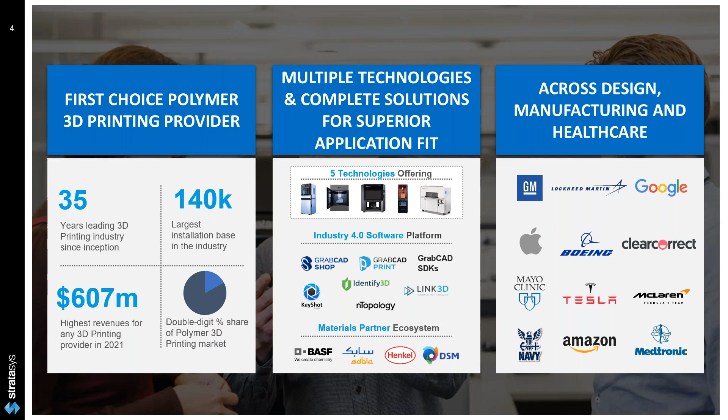Starting with the single FDM technology, today there are 5 solution offerings from Stratasys. We'll look into it more in depth when we cover each of the technologies. However, for a brief introduction across various design and manufacturing platforms, we also look forward to support the healthcare division or the medical vertical. That's where you get to see some interesting names like Medtronic, apart from the industrial majors such as Boeing in the aerospace division, so on and so forth.

So let's deep dive into understanding a little bit more on Stratasys 3D printing. What Stratasys believes and today offers solutions have begun with humble experience, understanding customers' needs, irrespective of any given vertical - whatever the need has been, in order to address the needs, Stratasys today offers 5 different solutions. In India, Stratasys has more than 22 plus years, and they're growing stronger with more than 850 plus customers and 1200 plus installations.

So there you go with education, automotive, healthcare, consumer products - a brief look at some of our customer names, apart from aerospace and defense. We are proud to showcase some of our valuable customers who are using the Stratasys product line. Here I take you with this automotive anthem from Stratasys, a video that takes us through how Stratasys 3D printing or additive manufacturing supports automotive as a given vertical.

Over the past quarter century, the automotive industry has seen remarkable advancements in manufacturing and technology. Helping shape that change has been Stratasys. Since our inception, we've been at the forefront of unleashing the imagination of designers and manufacturers, bringing their ideas to life with speed and efficiency.

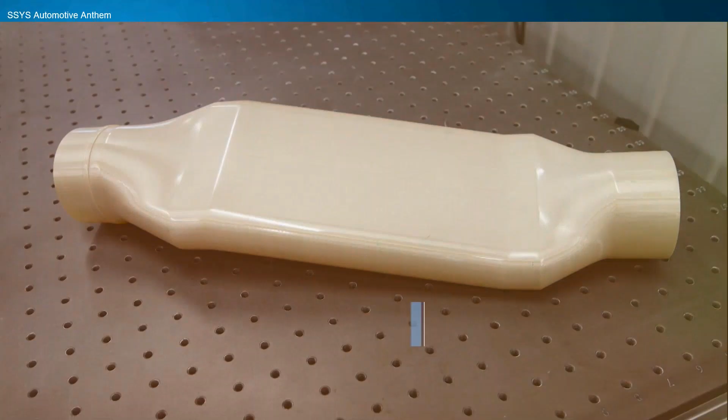Stratasys prototyping capabilities have shaved months and even years off the development process, reducing investment and hard costs dramatically. Automakers and suppliers of all types have realized the benefits of Stratasys 3D printing, and we've seen our technology go from the design studio to the factory floor with the adoption of custom 3D printed tools, jigs and fixtures, end-use parts, and low-volume injection molding.

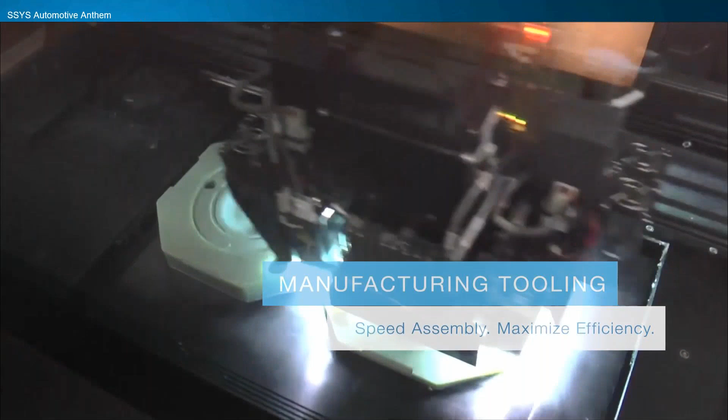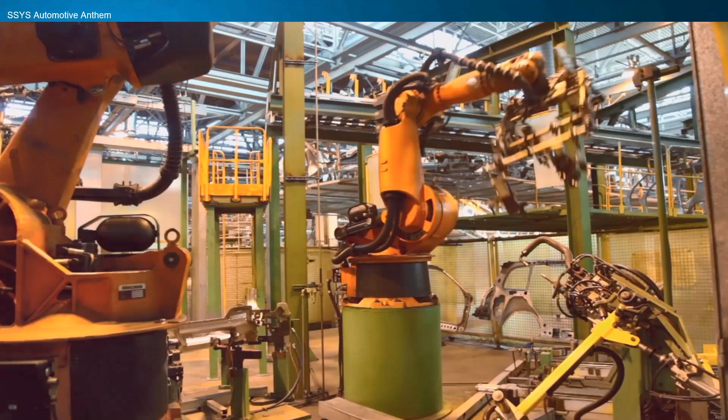We are reducing manufacturing costs and maximizing assembly line productivity. Stratasys can be found on the line of some of the world's premier automakers, helping them speed manufacturing time and reduce the weight of production tools. Stratasys is shaping the way cars are being imagined, designed, and developed.

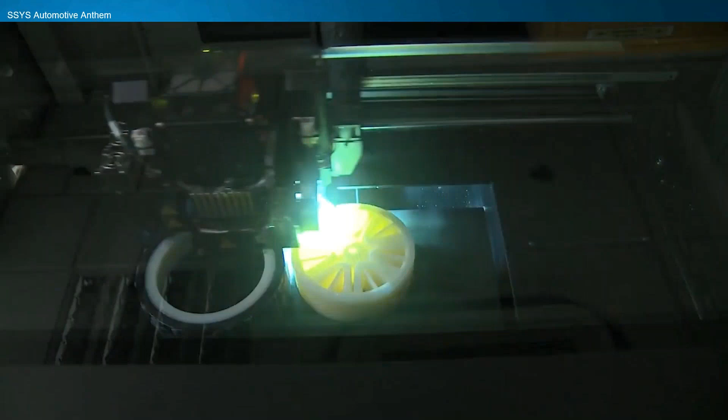Production parts can now be 3D printed in small volumes and even manufactured as part of the final vehicle. Lightweight end-use parts are reducing production costs and increasing fuel efficiency. And with next generation materials and technologies, Stratasys is positioned to help shape the industry for years to come.

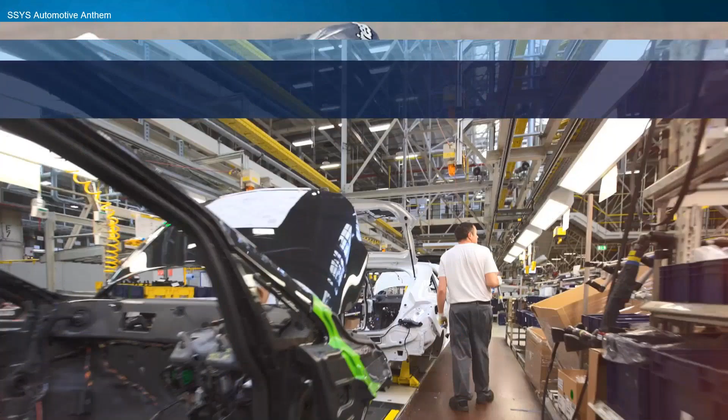Stratasys offers a wide range of 3D printing materials for demanding automotive requirements, from clear and rubber-like photopolymers for detailed scale models to tough, high-performance thermoplastics for extreme real-world environments. We empower automotive manufacturers to stay one step ahead of industry challenges with cutting-edge engineering solutions and a range of additive manufacturing technologies for custom applications.

Stratasys is shaping more than tomorrow's automobiles. We are helping shape the innovation, creativity, and manufacturing capabilities of those who drive the industry forward.

So, it's been an interesting introduction for automotive customizations from prototyping to manufacturing solutions with Stratasys. Now, in comparison to traditional or subtractive manufacturing, there are quite a lot of advantages with subtractive, but let us also look into some of the disadvantages when you're going to realize a physical part from a digital data.

It's a longer setup time. You need specific tools for every given operation that you need to carry out and multiple settings. It's not a single step process. And more importantly, designs are limited and locked to only manufacturing designs that can be taken up in the subtractive world. You would not be able to achieve lightweighting of parts. And more importantly, while we talk about lattice structures to optimize the weight without compromising on the component's performance, these are areas where there are a lot of disadvantages that we look at.

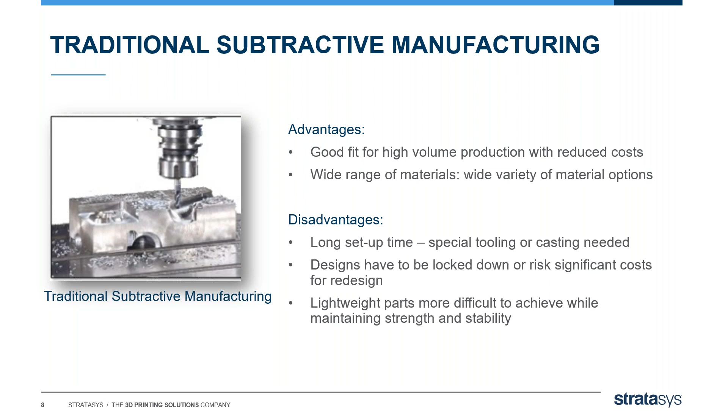However, when it comes to the best fit for productivity, it's subtractive. Let's look at 3D printing as a complementing technology that can work along with subtractive manufacturing. That's the message that I want to give.

So additive advantages - we are looking at unlimited advantages, because there is no limiting factor when it comes to designs. The freedom of designing, freedom of designers to bring out their best ideas that could take shape. Irrespective of any given complexities, 3D printing as a layer by layer additive process gives enablement to achieve any given complex design in real time.

And this could also enable supply chain issues that could get sorted out with flexible supply chain, and more importantly, without tooling, you get the most complex parts in quick turnaround time. Whether it's casting, using a polymer part, you also get sheet metal parts today with the manufacturing process. So there's a whole lot to talk about, but let us look at some of the brief disadvantages. There's a limited availability of materials.

Traditional manufacturing becomes more mature, but whereas when it comes to realizing the first prototype or lightweighting your manufacturing tooling, other than 3D printing today, we cannot expect any other solution to support.

So based on all the customer's needs and understanding what the customer requirements given from various vertical statuses, today I have 5 technologies and they are best in class that we are going to look at. The polyjet on the far left, let's begin with, we have stereolithography, and in the middle we have origin P3. Well, here is a 3D printer for manufacturing, production parts, end use parts, very interesting.

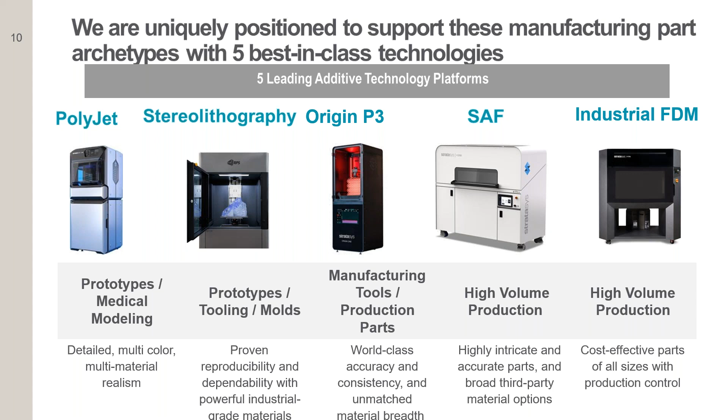SAF is a powder bed fusion technology, selective absorption fusion, and there goes the workhorse, the industrial FDM, introduced by Stratasys, the patented technology that we talk about. So it's beyond prototyping today, even for high volume production. So each of the technologies are very unique. Let me take you through very briefly with how the industry is adapting additive manufacturing solutions of Stratasys.

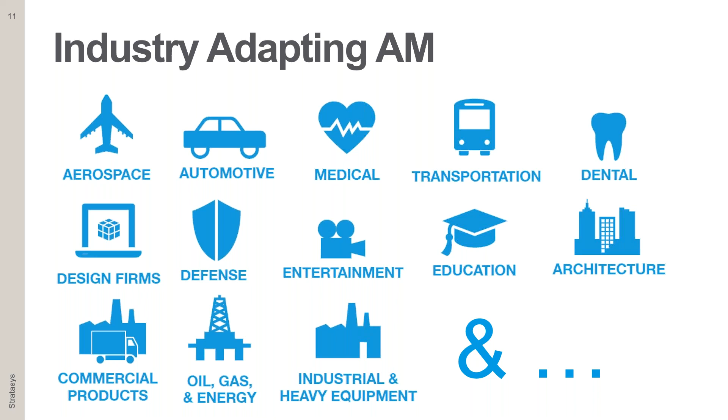Let's begin with aerospace, then we move on. We're looking at automotive and various other verticals that are benefiting from Stratasys additive manufacturing solutions, and it keeps growing.

Design, engineering, manufacturing aids and production - where do these solutions stand? We look at the jetting process, or the material digital light processing as a P3 technology - programmable photopolymerization is what P3 is all about. For volume production, the technologies are powder bed fusion and DLP. But when it comes to FDM for manufacturing aids, jigs and fixtures, and large parts, it's the best in class for industrial outputs. And for engineering your designs for visual prototyping, there is SLA as well as polyjet.

So what's polyjet all about? Here we are looking at multi-material realisms - you're able to achieve high fidelity end product models with polyjet, on a single tray, whether you wish a single material output or a multi-material combined end product. By end product realisms, I mean products that finally get labels, text, colors, and every given detail, ideally printed out. That's exactly where these are called high fidelity models. And more importantly, beyond the engineering realm, we look at medical anatomies today with polyjet technology.

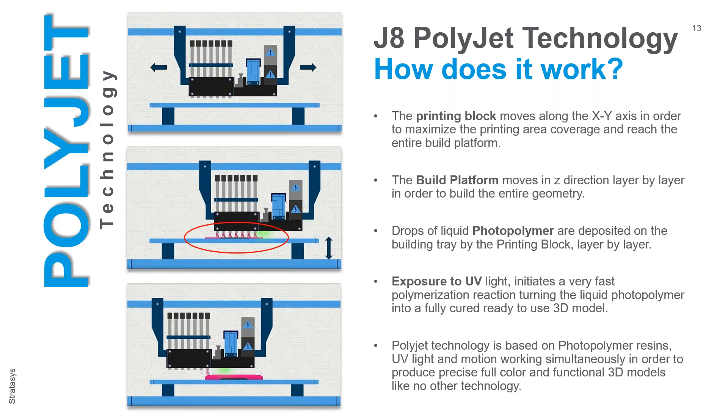It's no match to what the capabilities of polyjet technologies are. The polyjet systems and solutions from Stratasys work on photopolymers. When exposed to UV light, they solidify from a liquid to a solid state. The process begins layer upon layer, and you have finest layers of 14 microns - that's how unique this technology is.

So here you see that you could turn your design inspirations into reality - a fabric model printed with all the details of a smart speaker in a single shot. So whether we look at concept shapes, detailed designs, or the final design, by combining multiple materials you have the best in class. Irrespective of any demanding design needs, here is a solution to enable realization of your high fidelity models. You see transparent, opaque tests, and a PCB in different colors - and the only technology today that could support nearly 2,000 different Pantone shades, Pantone validated 3D printing solutions from Stratasys. These are compact systems that could meet your design realisms.

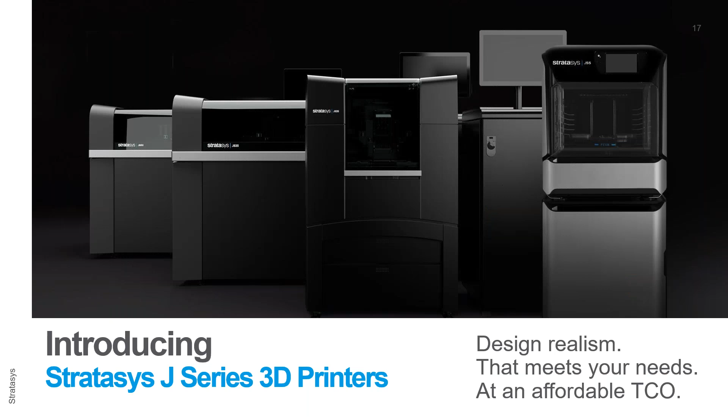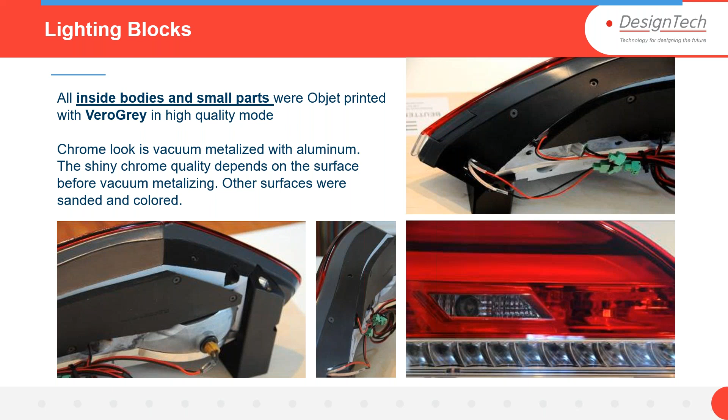Now some of the lighting blocks in automotive are crucial and critical areas of work in the development process. Any given R&D team from the automotive sector has to step into having complex designs realized, and that could only happen with tooling, which consumes a lot of time in the manufacturing process. Here we have a 3D printer that could give you an output with very minimal post-processing comparable to injection molded clear parts in different colors and shades.

Here's a video from Audi which has English subtitles.

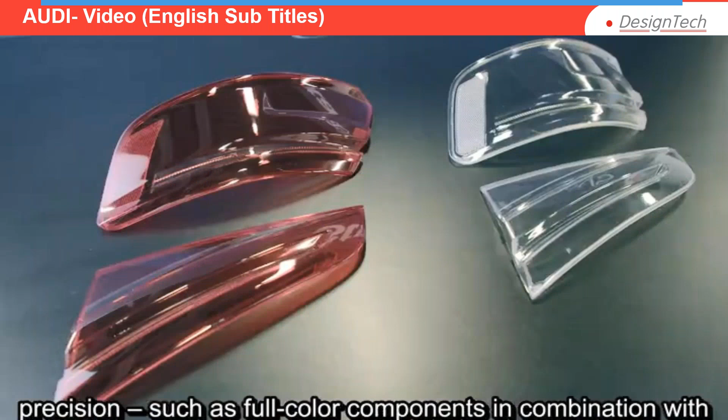Die J750 ist überall dort besonders geeignet, wo es um höchste Präzision geht. Vollfarbige Bauteile in Kombination mit Transparenzbereichen oder sogar flexible Oberflächen sind möglich.

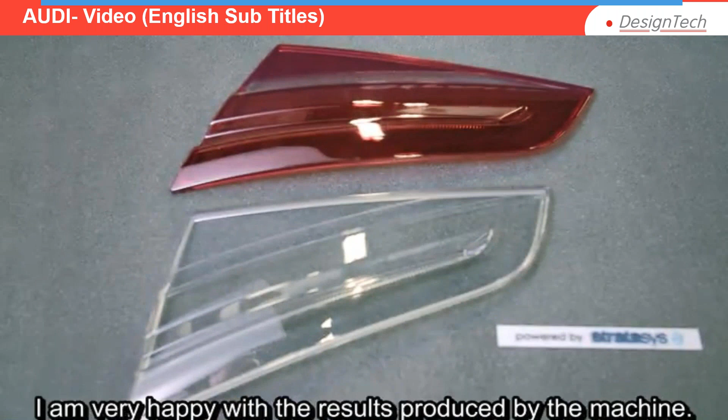Wir erwarten wirklich einen Geschwindigkeitsvorteil durch den Einsatz der J750 von 50%. Stratasys kommt mit neuen Ideen, mit neuen Ansätzen auf uns zu, nimmt unsere Anforderungen auf, sodass wir tatsächlich neue Anwendungsgebiete für den 3D-Druck erschließen können. Ich bin sehr zufrieden mit den Ergebnissen, die die Maschine liefert. Wir werden schneller und wir werden günstiger.

So well, today the PolyJet technology from Stratasys offers beyond what J750 is all about. We have the J850 combining 7 materials with advanced materials, vivid colors. We use the term ultra clear materials for higher levels of clarity in comparison to the injection molded parts, whether it is polymethylmethacrylate or polycarbonate clear parts.

So this is one area where we are focused to showcase some of the clear part challenges that auto industries come across. And we have the solution to print and develop your parts so that you will be able to do your functional testing and evaluations. Now it's time to move on to SAF.

What does SAF mean? Selective Absorption Fusion, right? Well, Stratasys H350 is a 3D printer with powder bed fusion technology. So let me introduce SAF to you all by playing this video.

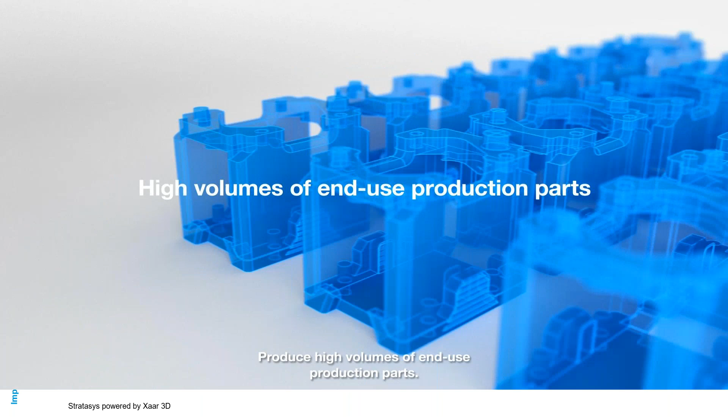Introducing Selective Absorption Fusion, or SAF, the latest 3D printing technology from Stratasys and the core of our H-Series production platform. Produce high volumes of end-use production parts, print after print. This is powder bed fusion reimagined. SAF's carriage architecture offers a unidirectional one-pass print fuse process, helping accelerate your production.

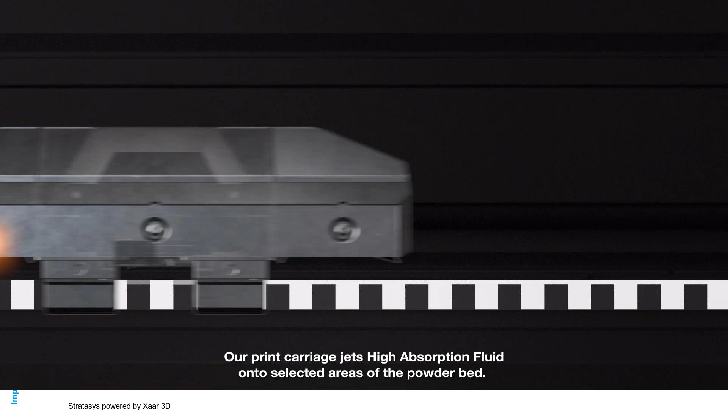Dual carriages operate inline sequentially across the print bed. Our print carriage jets high absorption fluid onto selected areas of the powder bed. In the same pass, an infrared lamp heats the particles in these areas, causing them to fuse together and form a layer of the part.

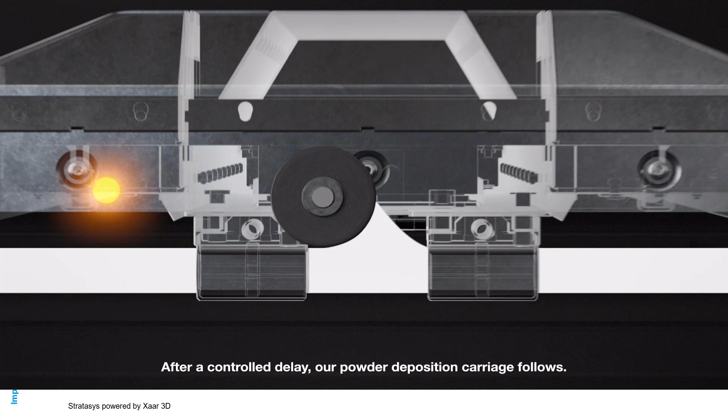After a controlled delay, our powder deposition carriage follows. Deposited powder is immediately heated, which benefits process reliability and part quality. All particles experience consistent exposure to temperature and time, wherever they are on the bed surface, ensuring stable part properties.

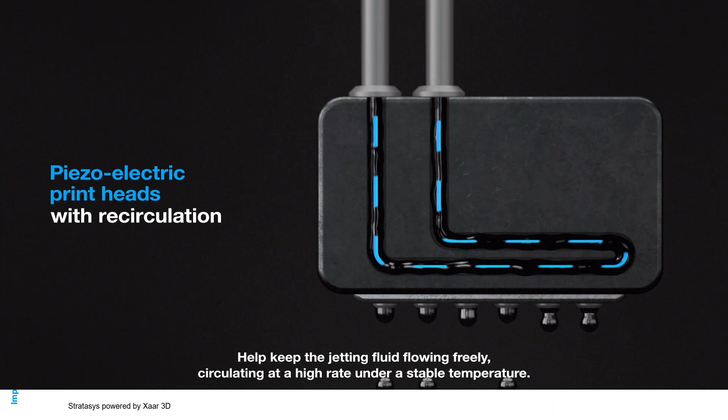Proven industrial-grade piezoelectric print heads help keep the jetting fluid flowing freely, circulating at a high rate under a stable temperature for long-lasting, reliable performance. Our big wave powder management helps maintain temperature control, reducing powder aging by immediately recirculating overflow powder.

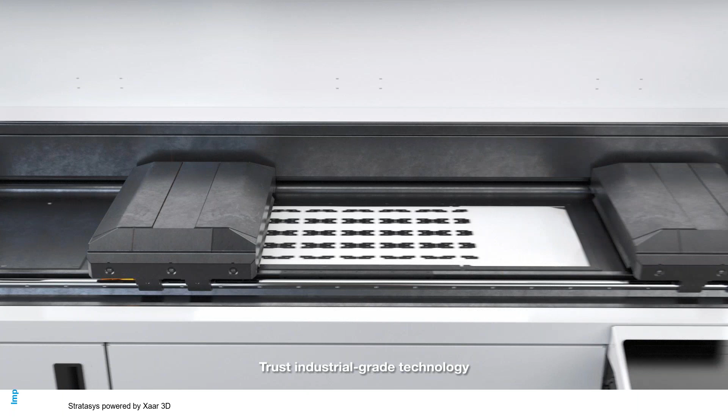SAF technology reimagines what's possible with powder bed fusion. Maximize production throughput with our one-pass print fuse process. Trust industrial-grade technology to print reliably and consistently. Print cost-effective end-use production parts in high volumes. Take your production to a new level with SAF additive manufacturing technology.

So with SAF here, we are looking at having volume production. While we talk about volume production, what are the materials that go along with? Today we have polyamide 11 and PA12. PA11 is a 100% bio-based material, which has been developed using sustainable castor oil, which has high ductility as well as that can take high impact loads.

Well, the SAF H350 that we talk about, the selective absorption fusion technology from Stratasys, today plays a major role for automotive OEMs to print interior parts.

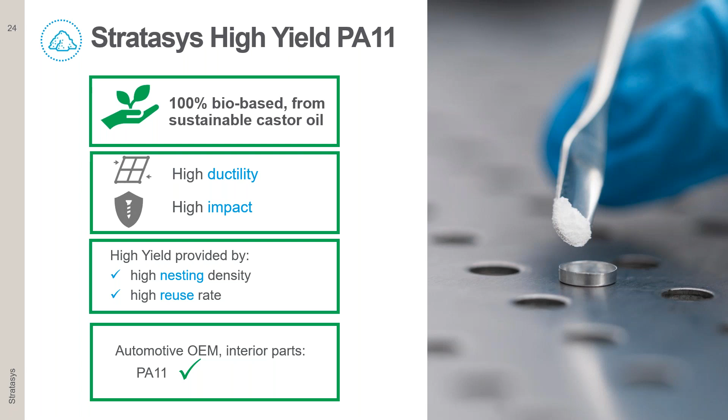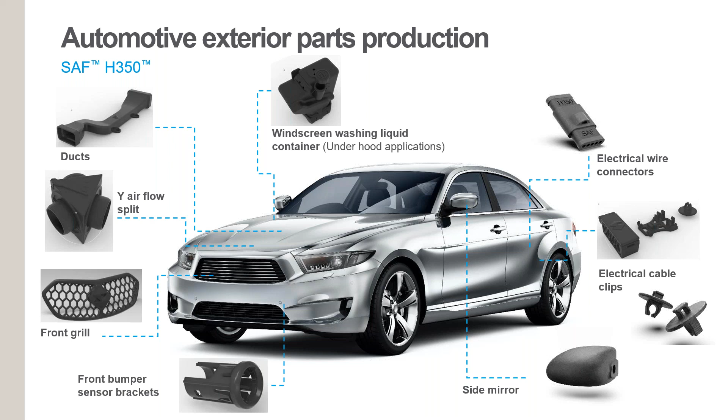Here's a silent video which talks about the automotive components, interiors and the exterior parts that are being printed using SAF.

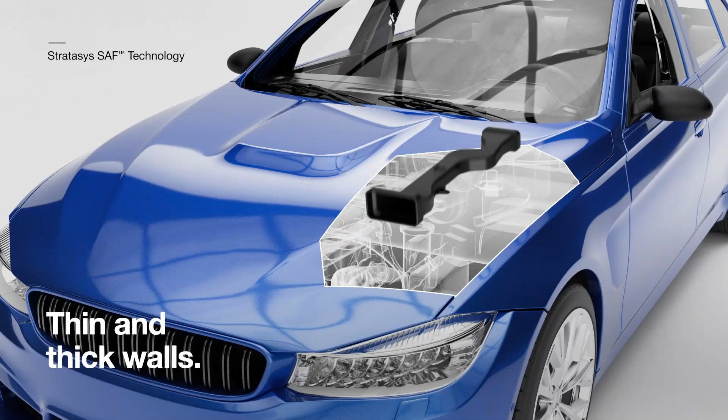So when we look at thick and thin walls, also we are looking at challenging geometries of the grill surface with smoother finish as well as better consistency of your parts that could certify production. Some of the interior components in an automotive that could be printed using the SAF H350 solution.

And these are not one time just for fitment evaluation or for a limited functional evaluation. These are end-use parts that are produced and can go in an automotive and serve till the life of the product. So unique value proposition in comparison to the powder bed technology that's available across.

Here we are looking at piezo heads, the industrial piezo heads, and more importantly, when it comes to quality issues like orange peel or the elephant skin, these are crucial areas working with powder bed fusion. And all these have been addressed with the H350 from Stratasys. So low cost as well as higher part accuracies, more importantly, repetitive quality without any secondary hidden costs.

So industrial grade and the production throughput, if you have to take a look at print heads with fluid recirculation, plays a very important role in governing the output in terms of qualifying on dimension as well as performance.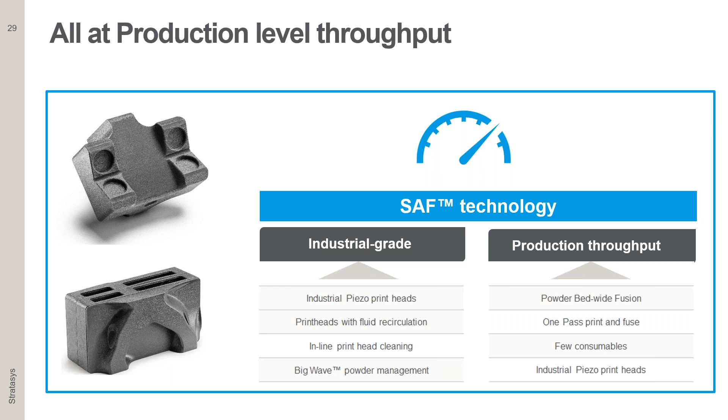So it is a single pass print and fuse, and more importantly, when we talk about single pass print and fuse, along with the piezo printheads, irrespective of wherever a part is being placed on the build area, there will be a unidirectional print and pass between two carriages, as we have seen in the video, that could give you quality of parts.

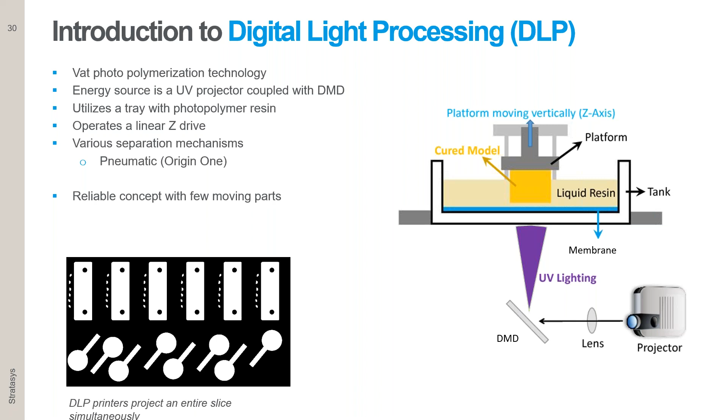Let's take a closer look at what the solution offers. When it comes to automotive, getting to market faster with 3D printed end-use parts, this is exactly what Origin 1 P3 supports. Electrical connectors, adapters, cable management components, all these go hand in hand when it comes to manufacturing production parts for automotive.

So why should manufacturers adopt 3D printing for end-use parts? The reason is lower cost, and more importantly, when you're having customized automotives with a limited quantity, the best support is without having to invest in tooling, you will be able to print parts with the best quality, with shorter lead times, lowering the cost, and productionize and use the output as an end-use part of the automotive.

All these small parts can be very crucial and critical. Spending time in making manufacturing tools would be too elaborate.

And what justifies more than the capability of the printer is the materials that go in. The versatility of materials combines with the technology to help you realize quality outputs. So, high throughput - take a look at some of the accuracies. We have surface roughness values of 0.2 micron for certain components that have been achieved. We have the highest heat deflection temperature, and materials that could comply with flame, smoke, and toxicity certifications.

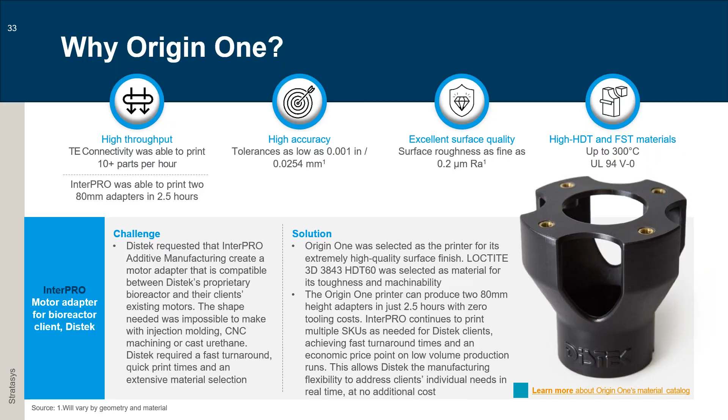So that's exactly where the Origin 1 is regarded as one of the production machines from Stratasys for automotive applications. Flexible manufacturing begins with Origin P3. Surface quality, highest accuracy, and repetitive quality are more important for producing quantities that are important in order to achieve results with parts that can go directly on automotives.

So high mix, low volume production of automotive end-use parts. Here's a slide that talks about what is perfect for manufacturing and the diverse range of materials - today we have more than a dozen material offerings from the world's major material manufacturers.

So, with DLP, we use liquid resin, and these resins have been supported by Henkel Loctite, BASF Plastic, Covestro, and all the big names, Evonik, and so on. Rubber-like seals, cable management components from rigid materials, connectors and adapters - you can name it. All these can be made with the Origin P3 technology.

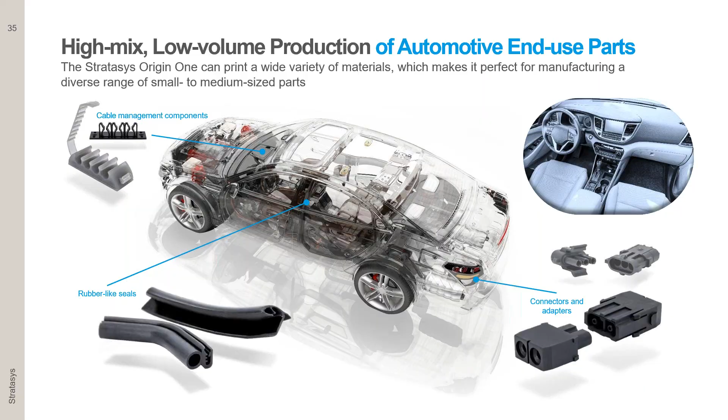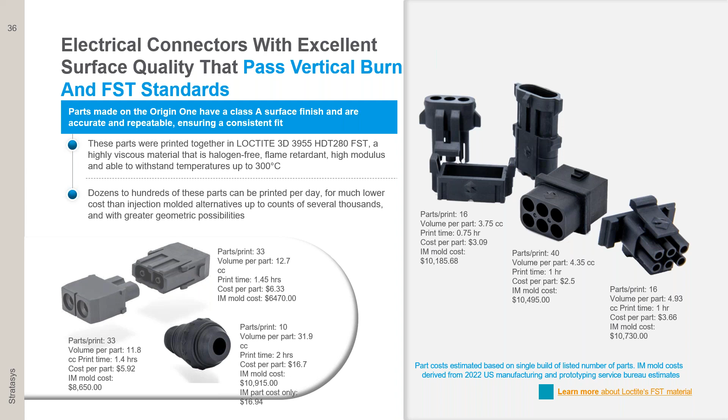Now, look at certain critical, challenging and demanding applications. If there is a test of electrical connectors that should pass the vertical burn and FST standards, we have the material from Loctite called 3955. Complex internal connectors can be printed with this material, which is flame retardant and can withstand heat deflection temperatures up to 300 degrees Celsius.

Flexible rubber parts, rubber seals and gaskets - given the complexities with the day-to-day ever-expanding and newer versions of automotives being introduced, the designs rapidly change. The change in design and the complexities added in the design process becomes more demanding for traditional manufacturing. It further extends the lead time and the cost in the development process.

But here the solution Origin P3 can be well adapted for having such critical parts made in volumes. That's exactly where the DLP process supports tough, durable cable management solutions. As you could see on the right, SOMOS is a material, and Loctite grades of materials are available. Primarily, all these different grades of material enable this Origin P3 from Stratasys to be a versatile machine for manufacturing volume production.

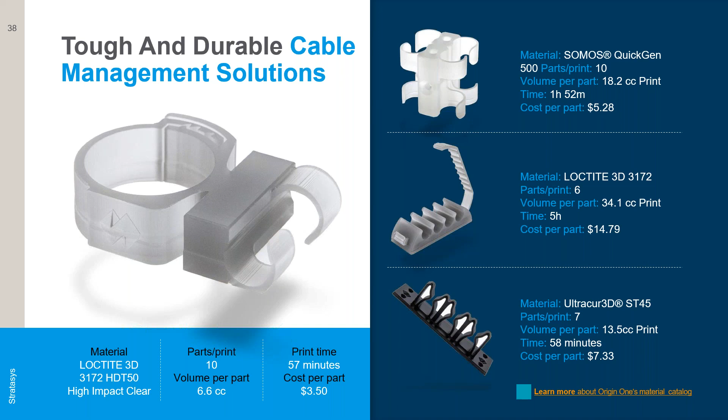Very quick turnaround time, highest level of quality. With a low area of workspace, you have on the Z-axis close to around 370 plus millimeters, so you can do Z-level stacking to print parts.

You can vary your layer thickness. Any 50 micron smallest features can also be produced with this P3 technology. With a 4K DLP projector, you have the best surface finish, comparable to injection molded grades of surface finish, on a larger area of a given geometry.

More importantly, with very limited material, you're able to process the Origin 1 P3. You need not load the machine with multiple liters of material. You can work with just a few grams of material as well. If you have a part of 50 to 100 grams, you can begin working with 200 to 300 grams of material loaded in the vat. With different materials available, it's a simple and easy process to remove the resin and reload a newer material to begin part manufacturing.

Here's a quick video on the Origin P3 as an introduction to the automotive world.

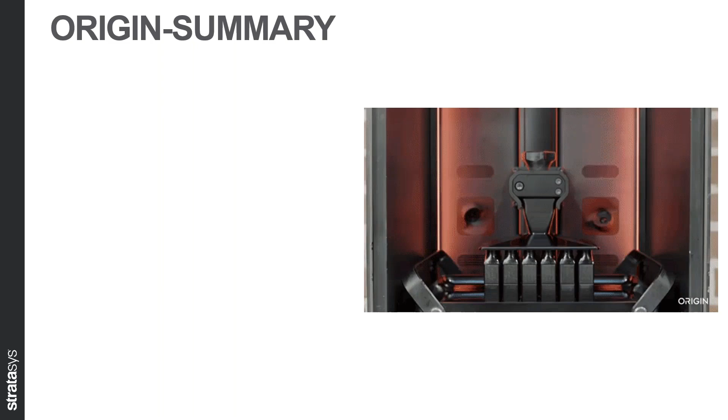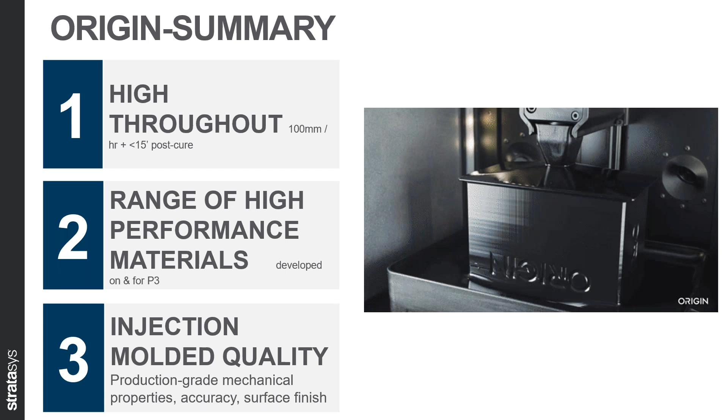So let's summarize the Origin 1, with the highest throughput and a range of high performance materials. On most of these surfaces you get injection molded quality with production grade material properties, highest accuracies, and surface finish. That's to summarize the Origin P3.

Now we begin with the workhorse, the industrial FDM technology from Stratasys. Here we have the Fortus 900, which can work with almost any given polymer addressed today, because we have more than 16 different materials to work with. These materials can address a whole lot of manufacturing needs for the automotive industry.

Next in line, with the maximum number of materials that go into the F900, to a large extent can also be utilized with the Fortus 450. Coming down the line, we have office-shared systems, the F370 or F170 to begin with. These are exclusive patented technologies from Stratasys. The origin of FDM from Stratasys today has evolved multiple materials, even on the office-shared systems.

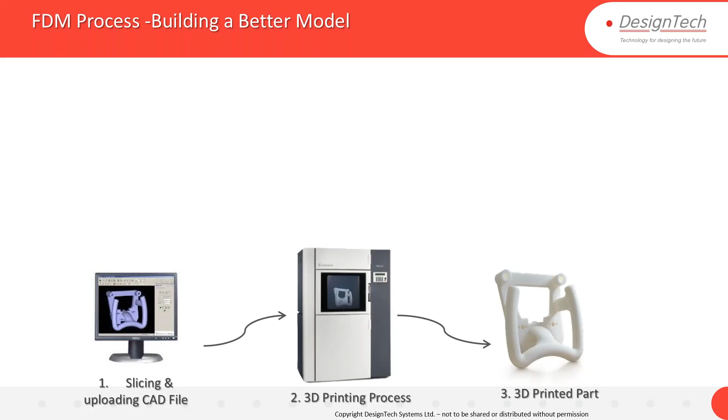Very unique. Let's take a look at how FDM is widely used in the automotive industry. But before that, let's look at the schematic which talks about model material and support material.

Predominantly on most Stratasys FDM materials, we have soluble support. The soluble support for supporting overhang features gives enablement for any given complexity to be printed out. More importantly, it's a hands-free support removal process.

With FDM technology today, we have offerings to print parts even 1 meter large. When it comes to cost, we have an affordable large build volume machine called the F770. What's unique with FDM from Stratasys is the vacuum-enabled heated chamber that governs the part output.

Today you have 3 different slice sizes to select and choose with reference to the geometry, in terms of its size and features, and the next level of application you'd work with. There are softwares from Stratasys that enable better customization and preparing print files for achieving the best results.

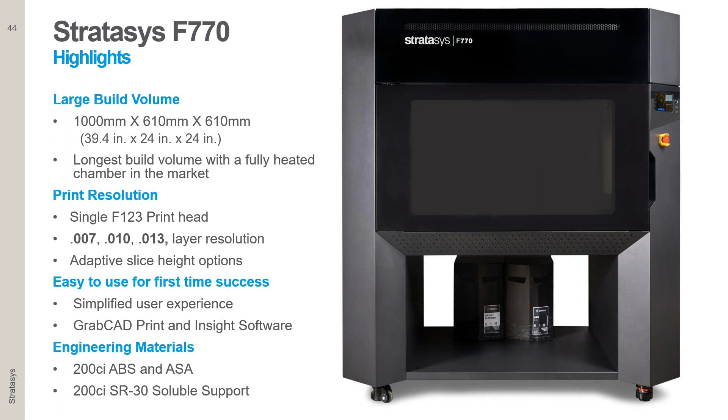When it comes to automotive applications, the factor of durability plays a very important role. Even at the first level of testing or prototyping, what matters is you have large parts, complexities of geometries, snaps, fitment zones. Multi-level evaluations are carried out today, field testing has been done, dry runs of these components once assembled on a pilot lot. All these are well addressed with Stratasys FDM technology.

So what are the key applications we're looking at for automotive? Large prototypes, jigs and fixtures. Remember, jigs and fixtures play a very important role for any manufacturing industry. Here we have a solution that supports beyond jigs and fixtures, into tooling.

Remember, the soluble support material used can also serve as a soluble core for complex carbon fiber layup tooling. For working with complex designs without having to section the complexities, you'll be able to achieve this using soluble core as a material.

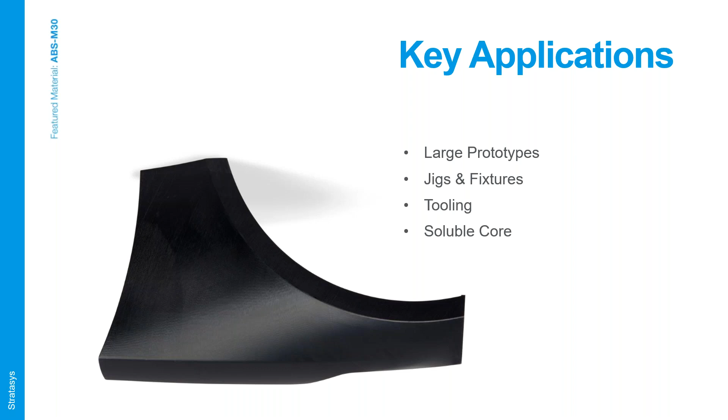With the largest F900, looking at automotive applications, we have parts that could be printed as an instrument panel, or bumpers, functional parts, gauges, check fixtures, assembly fixtures, and certain spare parts. When it comes to production or end-use part manufacturing with FDM, this can also be accomplished with the Fortus 900.

Remember, here again we're talking about not just standard plastics. These are industrial grades of thermoplastics that we use, and we have high performance materials.

Not just the automotive industry, but also aerospace and space applications use these high performance materials, along with certified grades of materials for traceability. These are today's offerings from Stratasys on their FDM solutions.

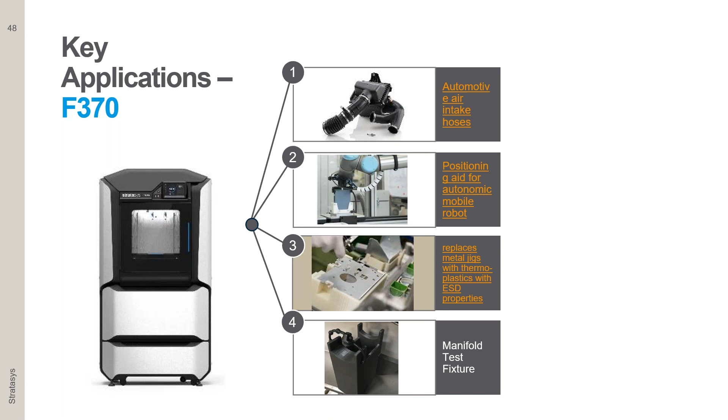On the smaller desktop or office shared systems, we see automotive components such as air intake hoses made with TPU, thermoplastic urethane, along with materials such as ABS and nylon, as well as carbon fiber reinforced materials. So there's a whole variety of materials supported, whether you begin with a PLA material for initial data realization in physical form, or move up the ladder to prototyping with more standard and engineering grades of materials or high performance materials, FDM is the solution.

With nylon 12 carbon fiber, projects taken up as POCs and executed with automotive majors worldwide have replaced metal parts, lightweighting them while not compromising on functionality, serving as a greater tool by saving cost and time, as well as lightweighting the manufacturing process.

Now, critical components when it comes to automotive are areas where we talk about textured parts. You'll be able to have certain textures with which you print, and these printed outputs are qualified for exterior application. When I use the term exterior applications, I mean outdoor applications.

Due to quite a lot of challenges with temperatures, sunlight, and more importantly wear and tear when exposed on an automotive as an exterior component, you have the versatility of working with ASA, the styrene-based material, apart from ABS. ABS without the butadiene content - we have the ASA that qualifies as an outdoor material for better aesthetics as well as realizing parts. You would not be challenged in any way for distortion, warpages, discoloration, etc.

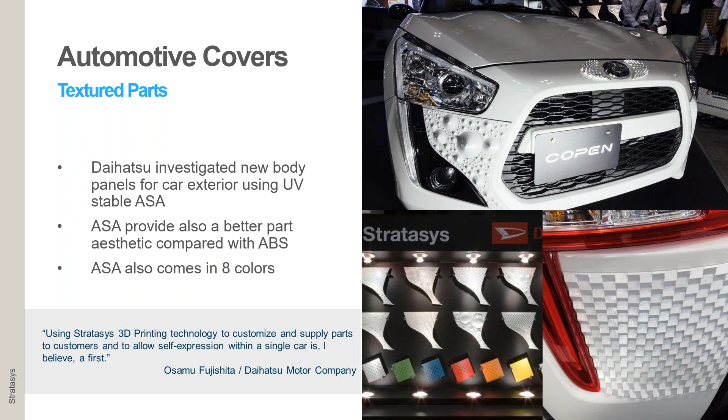Hence it also comes in 8 different colors. Daihatsu Motor Company has started using this for customizing automotive needs based on the selection from a prospect or customer. They go ahead and print an ASA part, and that is mounted on an automotive, then finished along with the body color or bumper color and delivered as a product. These are unique areas where Stratasys FDM end-use parts are playing a very important role, and it's very versatile.

Now, let us move to a more demanding tooling application. Tooling applications definitely demand that the tools can withstand impact loads, bear heat, as well as have good strength. For all this, there are various other technologies that could be selectively chosen. However, do they really qualify with the real strength when you're looking at tooling? FDM is the only solution here.

When it comes to impact resistance, nylon materials are much stronger than SLA. Similarly for mechanical properties, it's far superior with the nylon 12 carbon fiber reinforced materials.

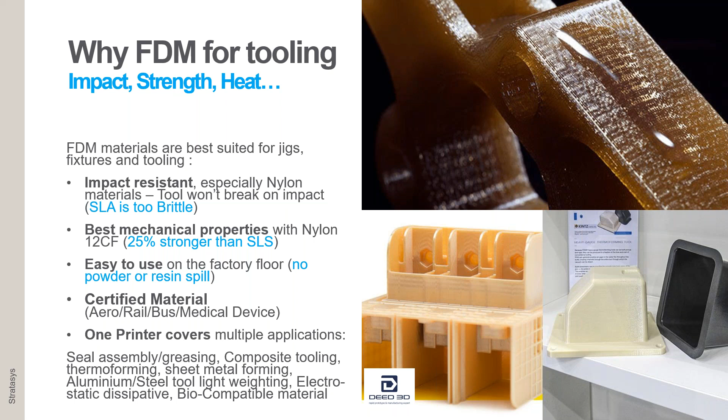There are certified grades of materials, whether for aerospace, rail, bus, or medical device manufacturing. For the transportation department predominantly, it's quite imperative that traceability plays a very important role. Remember, these are single printers that come along with multiple materials, and hence they address multiple solutions - whether sheet metal forming, composite tooling, or lightweighting of your parts. Here's a technology that doesn't compromise, but keeps delivering what is desired.

Another case study from BAC - here we are talking about an airbox, a very critical element of the car's high performance. These components are again made with the nylon 12 CF material. Some of these materials have been tried and tested in a higher heat environment, close to around 140 degrees Celsius.

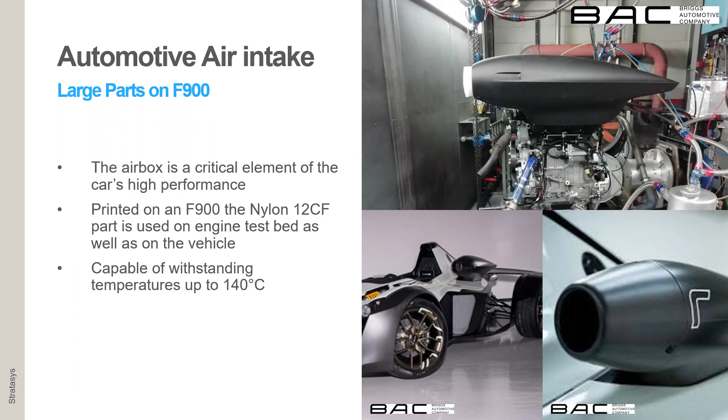A very important application perspective is Eckhart automotive jigs. Eckhart has a particular tool for mounting a wheel and various other areas in their line of work, and the FDM technology has been very widely accepted and acknowledged by Eckhart, because the FDM solution serves most of the demanding manufacturing applications on the shop floor. I have a video coming up with Eckhart that speaks about the various areas of manufacturing in the automotive sector addressed with FDM technology from Stratasys, with its durable materials, highest level of accuracies in the extrusion principle of additive manufacturing, and with repetitive and reliable quality.

Industrial manufacturing solutions provider since 1958.

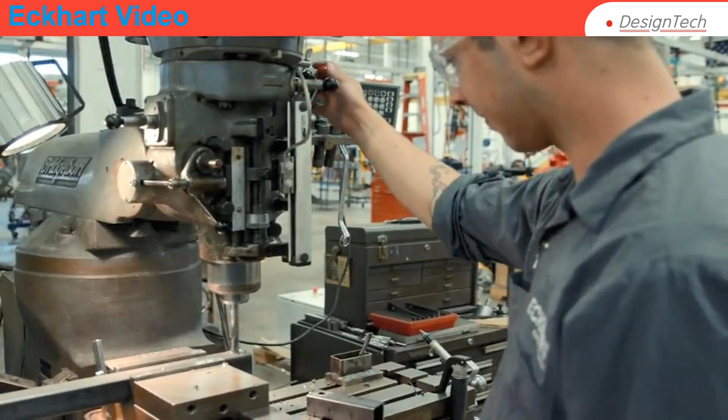Manufacturing is a very difficult profession. You're under extreme pressure to work with a constrained supply base. There are part shortages, expedites coming in from all over the world, and end customers whose tastes and preferences are changing every day. Insofar as the shortage of skilled workers is concerned, this is a theme we hear constantly from our customers. We can provide solutions that are not replacing operators, but making up for the operators they can't hire.

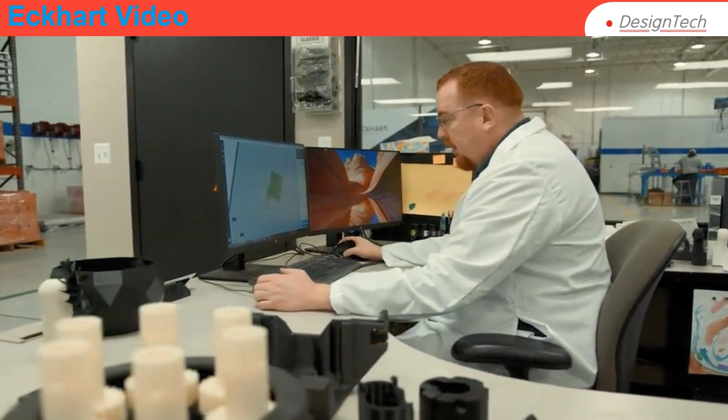We see additive manufacturing, and specifically the lightweighting aspect of it, as a great solution we can offer our customers. Our customers want proven, durable solutions. These tools are used 60 times an hour for an 8-hour shift, 3 shifts a day, 6 or 7 days. Eckhart's motto is 'for the life of your line.' Anytime we can replace a historically metal component with a lightweight, equally strong, if not stronger, plastic component, we believe we have fulfilled exactly the promise we've made to our customers.

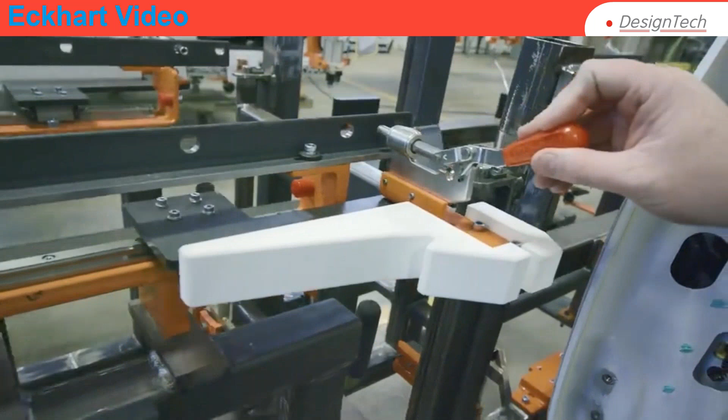We feel very strongly that 3D printing is really the catalyst. It's the enabler that allows us to work with suppliers to iterate, come up with ideas much faster, test those ideas, and have a proven solution we can use in manufacturing.

We had to design a pick-and-place robot that had a fairly specific end-of-arm tool setup. With additive manufacturing, we were able to design a couple of different prototypes, print them, try them, and ultimately, with limited time and investment, end up with a bracket for the end-of-arm tool that was exactly what we wanted.

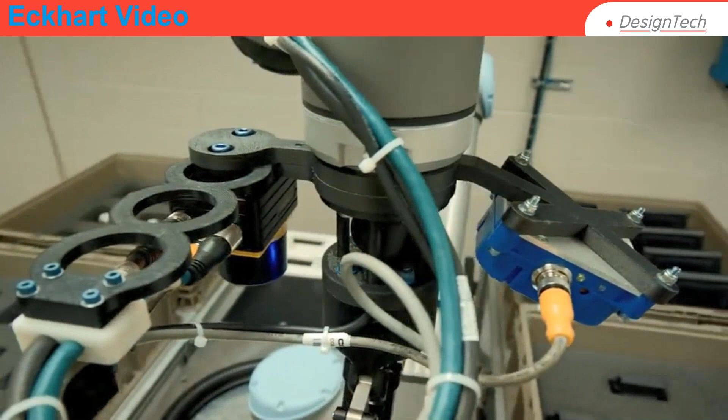We have developed a lug nut starter tool. Normally, the operator would pick up the lug nut and start it one at a time. This is a job prone to repetitive motion injuries for operators. They can use this tool, which is lightweight, to start all the lug nuts on a vehicle at once.

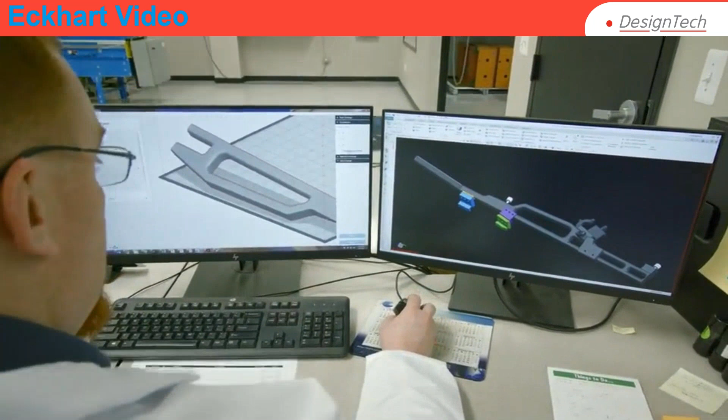Our big focus today is Industry 4.0. We believe 3D printing has the potential to truly lead significant transformation in the industrial space. So for us, it's the speed and the customization that is ultimately empowered through the use of 3D printing and through our relationship with Stratasys. With Stratasys and raw materials like nylon foam, carbon fiber, and Ultem 1010, we are able to produce durable, lasting solutions.

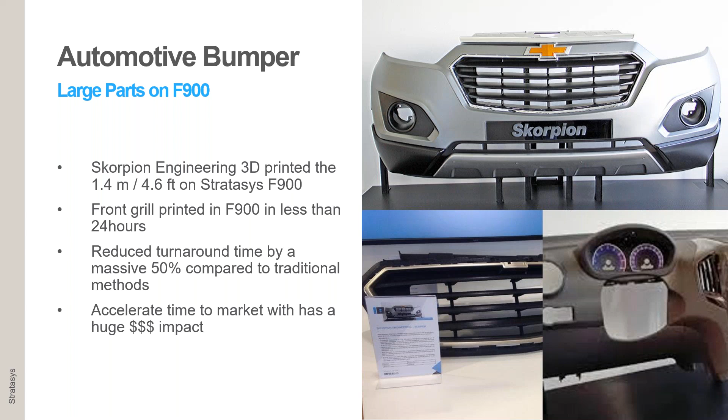So that's the testimony when it comes to automotive manufacturing applications from Eckhart. On large parts printing, such as the automotive bumper, we have 1.4 meter parts that have been printed in less time and, more importantly, with less cost. That's more important. And here we have some case studies.

These are raw parts in polycarbonate. The bumper has been printed in 5 sections, and post-printing you're able to bond them. What's very crucial here is qualitative output with controlled features and customized data that can be achieved in quick turnaround time. More importantly, the accuracies are very crucial. Post-printing, as a raw part, except for the joining, you don't even get to see where exactly the sections of this bumper are.

That's how higher accuracies and, more importantly, large part printing can happen by sectioning and having them produced to the highest quality. It means quite a lot.

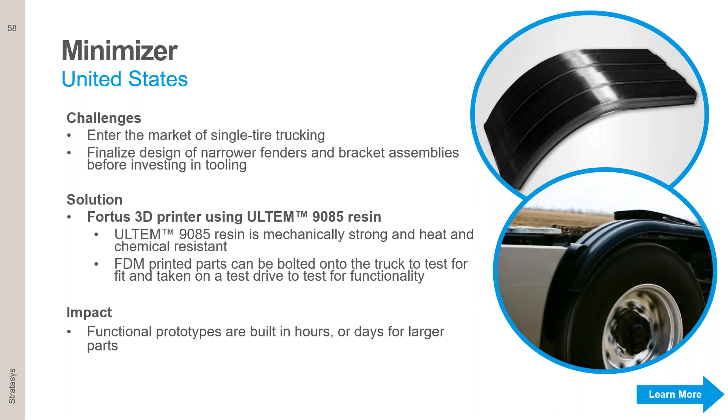This rear bumper fascia for exhaust gas flow testing has been developed using polycarbonate material. Larger parts, such as for a truck minimizer truck manufacturer, use Ultem material in black for testing their parts, such as the one shown in the image here. You also have the natural Ultem, as well as the fender here, which has been printed with black Ultem.

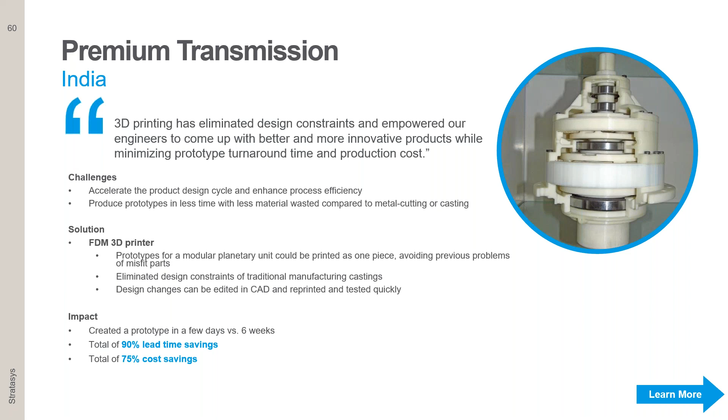Certain metallic parts, such as emission components like filters, have been replaced with FDM 3D printed polyphenylsulfone—a very critical part when it comes to 78 hours of functional testing on a V8 diesel engine. In India, we have premium transmissions and various other auto majors using FDM predominantly as a technology for realizing all their critical part manufacturing.

Ducati uses polycarbonate for new engine design to save on development costs and time. Along with ASA and polycarbonate, ABS and polycarbonate with PPSF, this entire engine design with multiple parts, critical and crucial geometries, have been assembled together with bolts for durability.

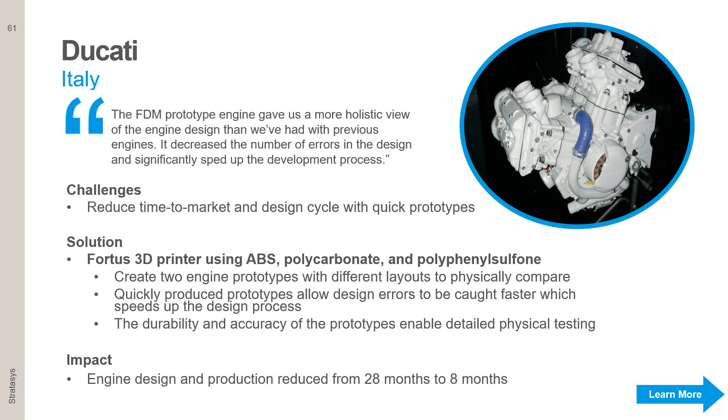Moreover, on the automotive front in India, we have various majors such as Honda using 3D printing solutions for headlight checking fixtures, trunk lids, rear windshield checking fixtures, edge checking fixtures, and some of the 3D printed parts in ABS as well as in digital ABS are mounted at the manufacturing line for evaluations.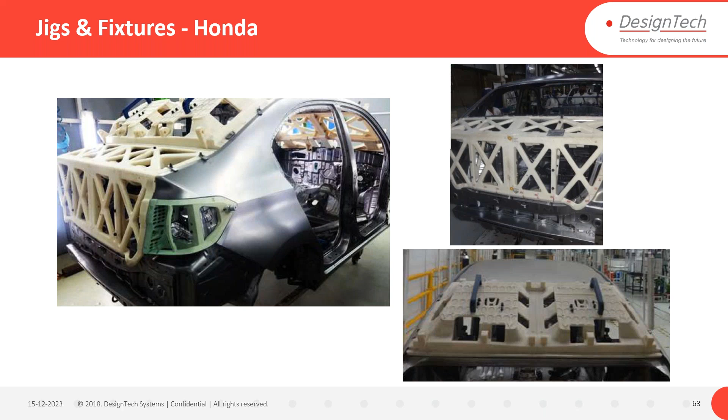What's very crucial is lightweighting, cost-effective solutions, and quick turnaround. You address worker fatigue levels on the shop floor by replacing metal fixtures. And a quick review in terms of the low end

or the low end workhorses, if I may, the F190CR and F370CR. These machines are exclusive to work with nylon CF10. So you have nylon CF10 on these smaller platforms to print stronger, stiffer, and more accurate parts. These are exclusive hardened systems with which you work.

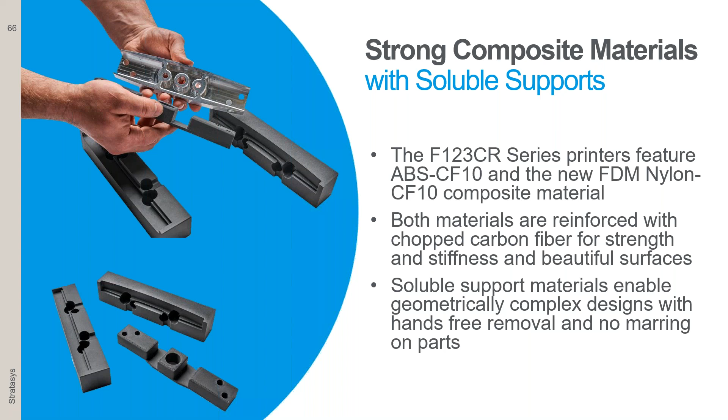And what are they supporting very well? We talk about soluble supports for these composite materials that go along. That gives enablement for having very high surface finish, strong, durable work holding fixtures.

So industries for manufacturing, heavy industries, transportation industries, consumer products - all of them have the flexibility to have shop floor tooling needs addressed by customizing and printing tools that could support manufacturing.

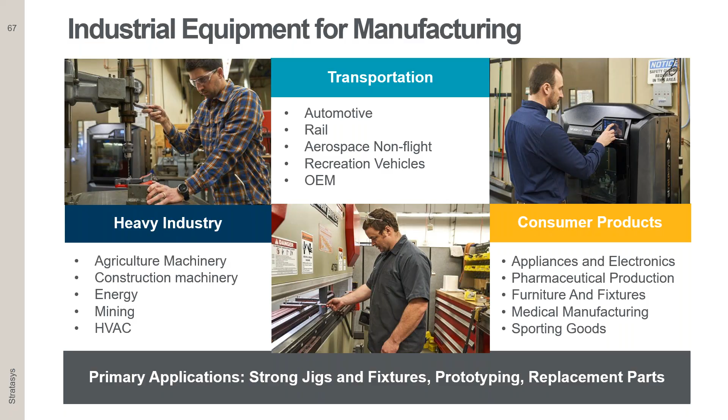Soft jaws are used here, the 3D printed nylon CF material for work holding. And here we see a press brake - sheet metal forming with the nylon CF material.

So even otherwise, with polycarbonate, ABS, or Ultem as a material, FDM sheet metal forming tools or stamping tools are very widely used in most of the industries.

Looking at the complexity, the CRCA, nearly 1.2 millimeter thickness, has been put upon a hydraulic press with a 5-ton load being applied to form the part. A polymer-based tool giving shape to metal.

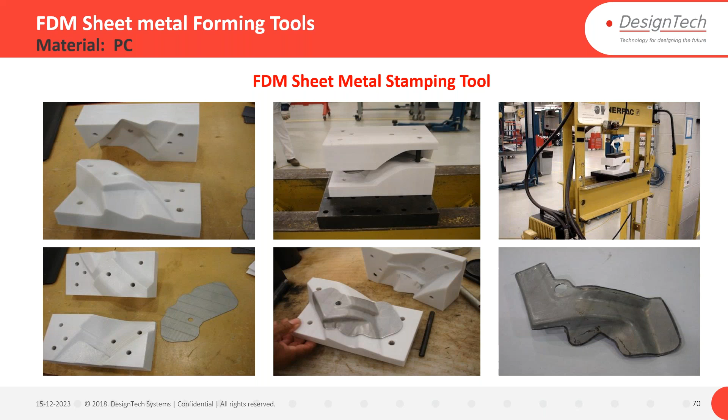Drill jigs - now you could see the drill jigs in a hybrid mode manufactured, because the cutting tool passes through with metallic hardened bushes.

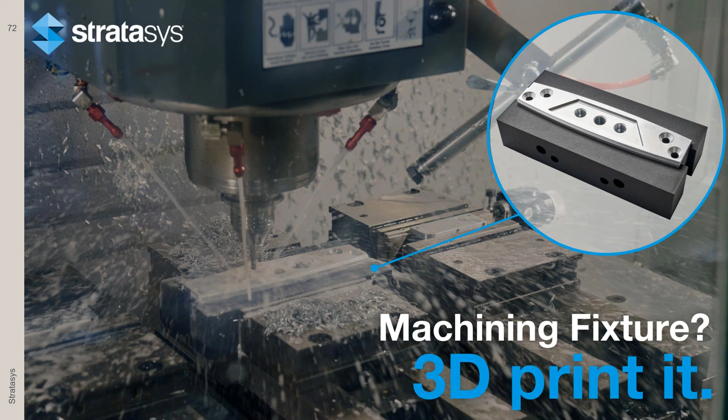Machining fixtures such as the one here is also 3D printed and used for various CNC machining applications.

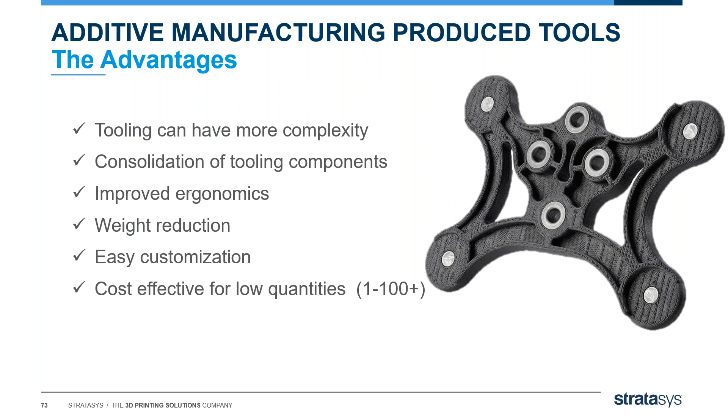So to summarize, let's look at additive manufacturing produced tools. We have a whole lot of surface complexities and feature complexities. All these could be consolidated, with improved ergonomics, reduction in weight, and customized solutions for low-cost applications - Stratasys 3D printing stands by for all the automotive needs.

So here's one fixture that we have executed for one of India's major automotive manufacturers, wherein this is an intermediary test fixture. What you see in ivory is only to give you clarity - when this fixture gets mounted under the hood for locating the chassis and the engine, it will get completely camouflaged.

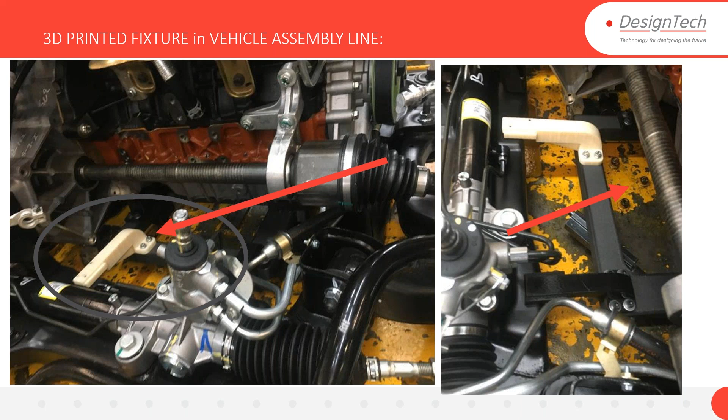So one of the legs in ivory mode, ivory material has been printed, and post assembly you could see that the entire fixture takes a load of nearly 280 kg to locate the engine on the chassis at the bottom, and it goes up to 12 stations before the entire completion of the engine assembly happens before it gets released. There you go. At the final stage, the fixture is getting released.

Well, let's look at - finally, Stratasys elevates capability to advance the digital factory. That's unique, that's important, with materials, and remember, repetitive quality. And also 3D printing is a solution in order to integrate into the factory setup - it's a complementing technology.